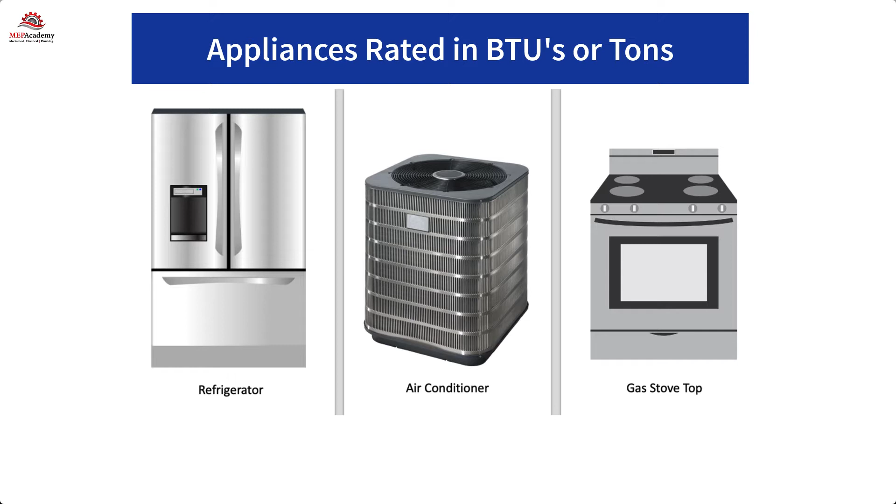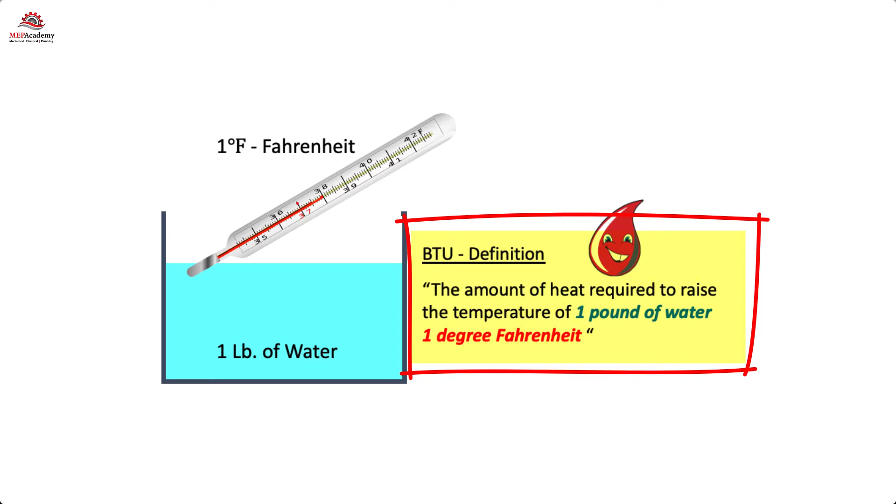First of all, what does a BTU stand for? It stands for British Thermal Unit. The definition of a BTU is the amount of heat required to raise the temperature of 1 pound of water 1 degree Fahrenheit. It doesn't matter whether you are heating or cooling. It's the same definition and calculation.

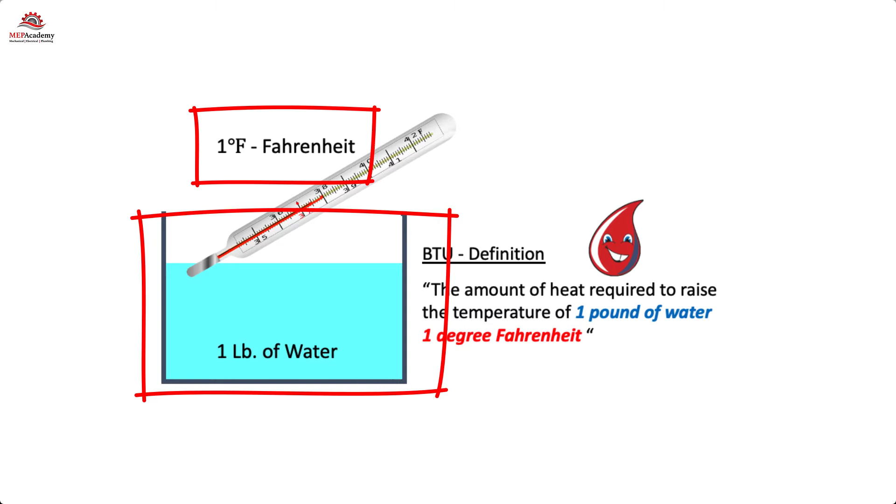1 ton of refrigeration or air conditioning. So how did they come up with the term tons? This comes from the fact that a ton, which is 2,000 pounds, of ice will absorb 288,000 BTUs in 24 hours, a full day. And since everything is rated by the hour, all the equipment, air conditioners, refrigerators, everything's rated in BTUs per hour. So we need to divide by the 24 hours to get the equivalent of 12,000 BTUs per hour.

So 288,000 BTUs divided by 24 hours gives us 12,000 BTUs per hour. That's what a ton relates to. So ice has a latent heat of fusion, meaning how much heat it will absorb per pound. It will absorb 144 BTUs for every pound.

So in a ton of ice, this is all working back to get our BTUs per ton. In a ton of ice, you got 2,000 pounds times the latent heat of fusion, which is going to give you 144 BTUs for every one of those pounds. You just do the math, 2,000 times 144. That's where the 288,000 BTUs come from. That's where the 2,000 pounds of ice at 32 degrees will melt and become 32 degree water.

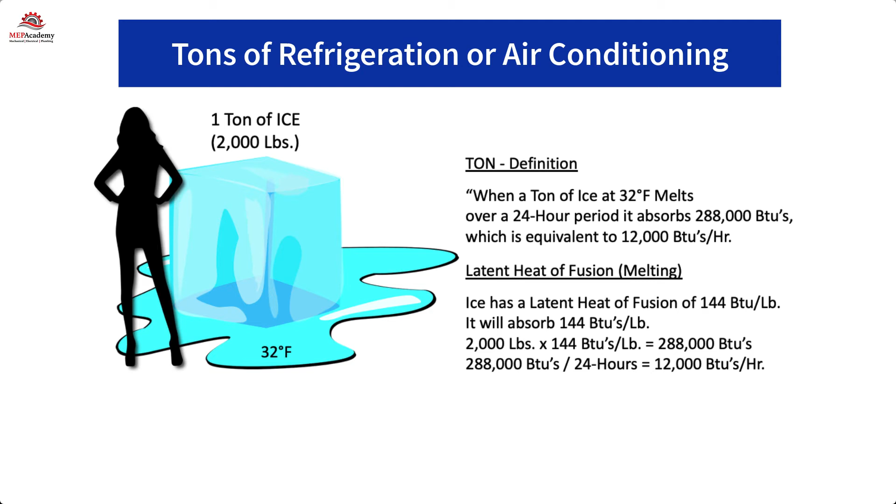So if it's still hard to wrap your head around just how much a BTU is in relation to everyday common items around you, here are some interesting facts about various outputs of BTUs. So, heat generated by people. One of the factors contributing to heat gain of a space or in a building is the people in it. Depending on what people are doing, they generate various amounts of BTUs. The more active, of course, the more BTUs are going to be burned or added to the space.

So you can see if you're sitting, this is total BTUs, meaning sensible and latent, you're burning 400 BTUs per hour. Standing, 450, moderate dancing, 850, and athletics, 1,800 BTUs per hour. These values come from ASHRAE, the American Society of Heating, Refrigeration, and Air Conditioning Engineers.

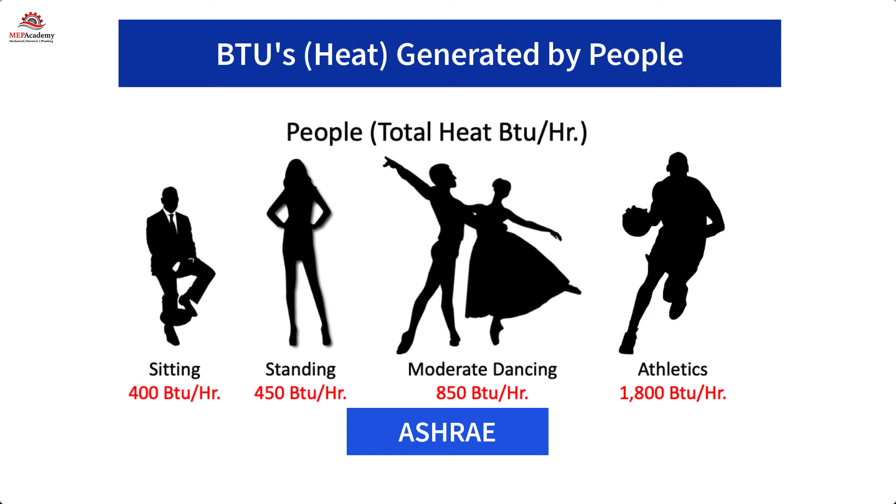Then you got heat generated by lights. With the transition away from incandescent lights, there is a corresponding savings in the heat output. A 100-watt incandescent light bulb puts out about 341 BTUs per hour. The conversion is for every watt, you have 3.412 BTUs. So it's just a math calculation.

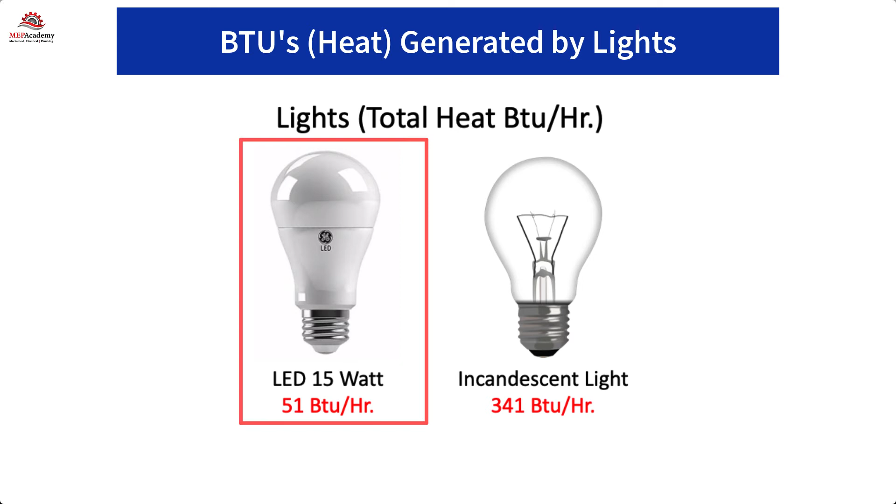And then the equivalent in lumens of this 100-watt incandescent would be like a 15-watt LED. That 15-watt LED would be putting off 51 BTUs per hour at the same conversion of 3.412 BTUs for every watt. Now, you got refrigerators, you got air conditioners, you got gas appliances.

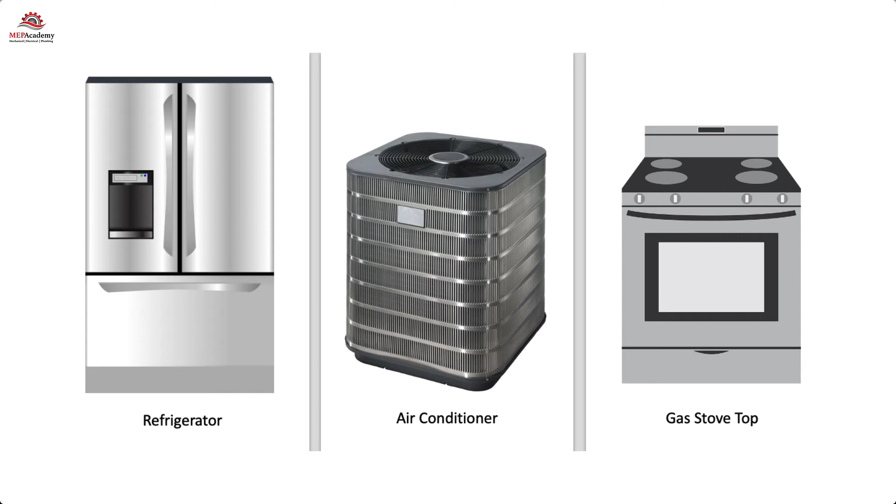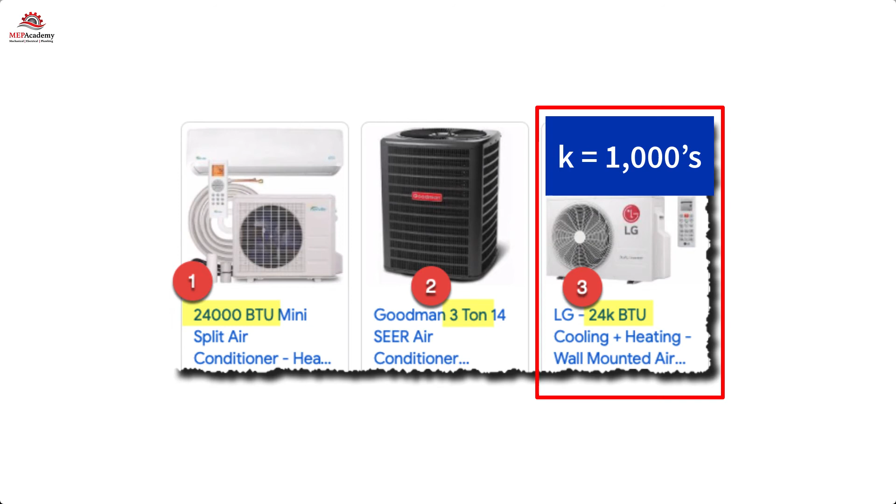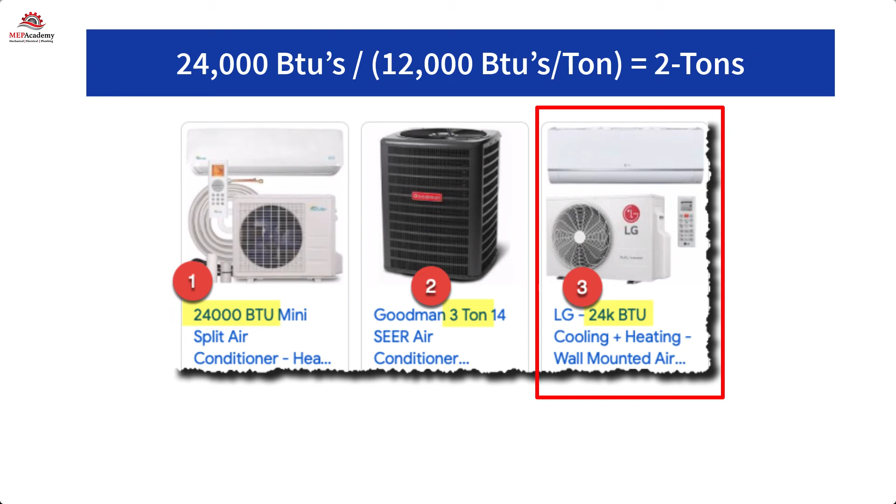And then the third one there, they give another nomenclature. They just say 24K. Well, in this case, K stands for 1,000. So that's 24,000 BTUs. And once again, that's a 2-ton unit. 24,000 divided by 12,000 is 2 ton. So number 1's a 2 ton and number 3 is a 2 ton. And the one in the middle there is a 3 ton.

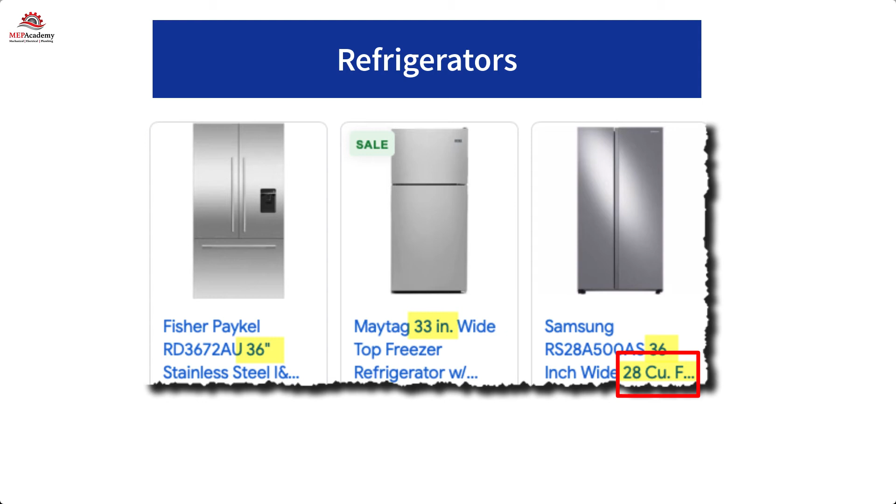So with refrigerators, there's almost no mention of capacity in terms of BTUs or tons. Instead, it's all about the width or cubic volume of the interior space. How much food can you get in the refrigerator? You don't worry about the BTUs as it's assumed that whatever size refrigerator you buy, it will be able to handle the heat from whatever you decide to put in it.

So I don't think anyone's ever bought a refrigerator and asked for 48,000 BTUs. They're always looking at the size, so it fits in their cutout in their kitchen, or the cubic volume. That's how they compare one to the other. And then the amenities, of course.

The larger the BTU burner capacity, the faster your food will cook or your water will boil. Check the specifications of the appliance to see what each burner is rated for. It could be anywhere from 500 BTUs per burner, for a small little burner, to 18,000 BTUs per burner. It's a big difference, and it's all about the speed of providing those BTUs, transferring those BTUs into your food or your water or whatever you're cooking.

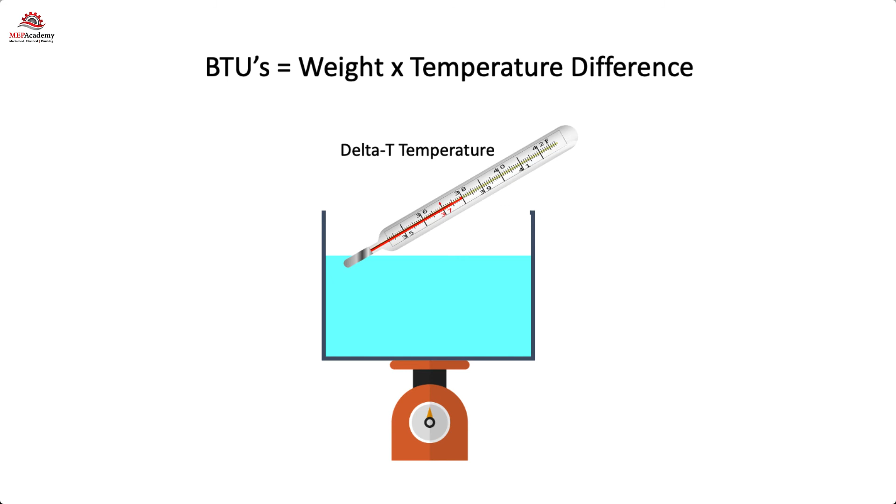For example, if you had a gas stove and one of its burners was rated for 5,000 BTUs, you could calculate how long it might take to heat your water, ignoring that there are losses to the surrounding space. So not all that heat from the gas is getting into your food. Not all heat gets absorbed, but just for simplicity, this is how the calculation would work.

Starting with 2 pounds of water at 65 degrees Fahrenheit and wanting to raise that to 210 degrees, which is just short of boiling. Boiling is 212. So the BTUs equals weight of water times temperature difference. So we're going to replace that with the information we know. We have 2 pounds of water, and 210 minus 65, our starting point. So that's 2 times 145, that's 290 BTUs to take 2 pounds of water from 65 degrees up to 210 degrees.

Now, how long is that going to take with a 5,000 BTU burner? Ignoring, of course, that not all the heat gets transferred to the product. So 290 divided by our 5,000 BTU per hour burner says it's going to take 0.058 hours or 3.48 minutes.